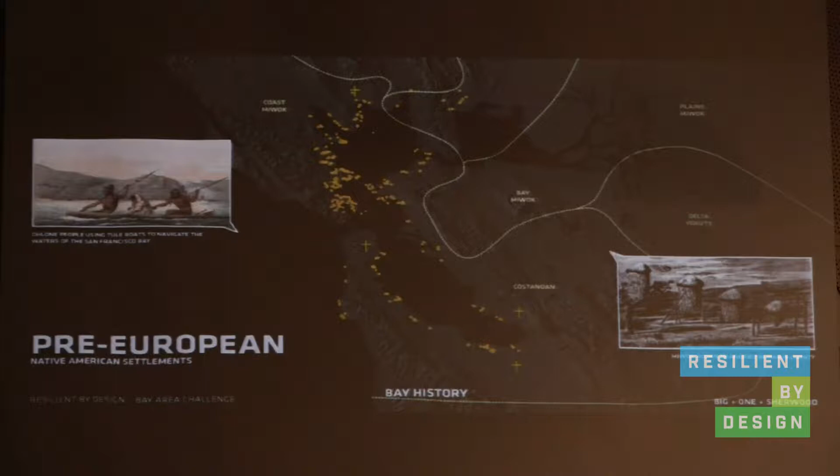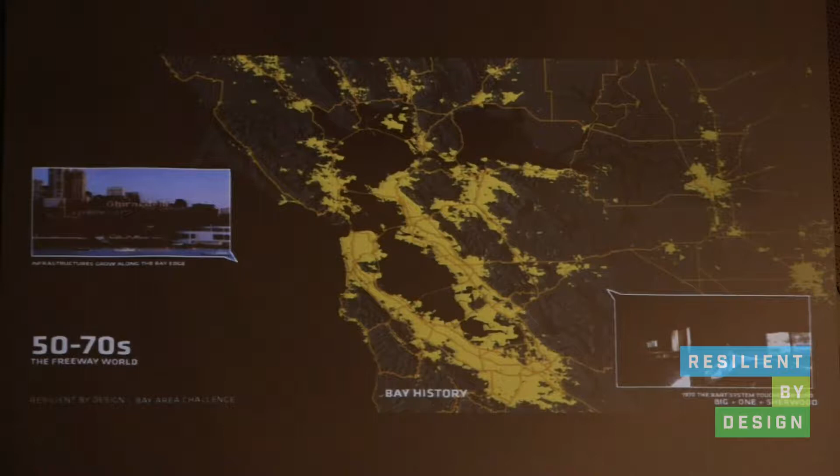If you look from early settlement, Native American, to a series of towns during the gold rush, the Bay has just kind of been expanding sequentially to the point that now it really works as one region, but at a scale that is disproportionate to any means to control it.

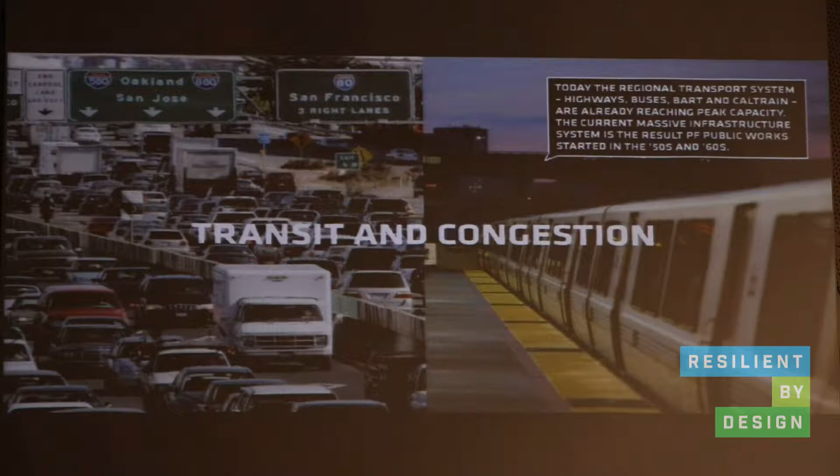And it's that kind of sprawl and development pattern that has led to the urban challenges we know today, from transit and congestion to housing, lack of affordable housing and displacement that results, strained infrastructure bringing flows from far away, ecological decline along the Bay's edge. And those development patterns and the emissions and lifestyle associated with it have also been in part responsible for the climate stresses that the Bay feels today.

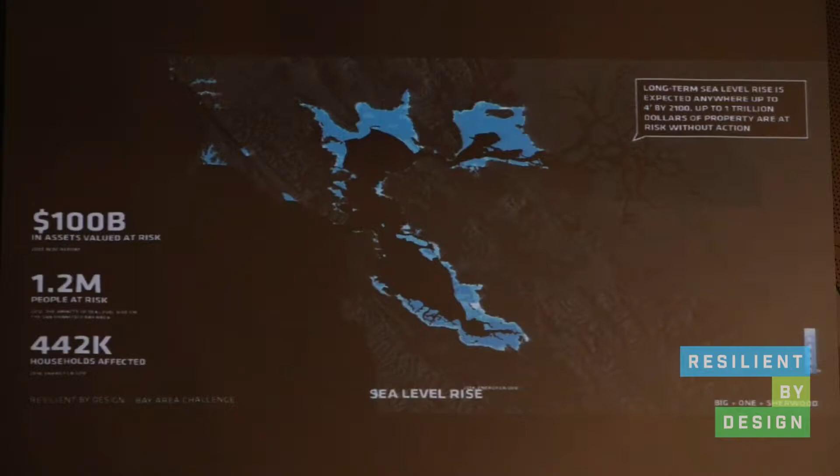From sea level rise and storm flooding, to drought and wildfires, to earthquakes and liquefaction.

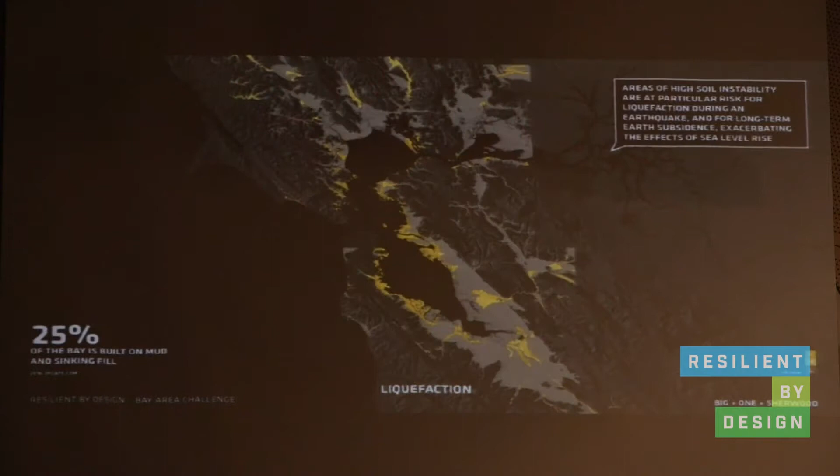And so our approach to the Bay has been that climate stresses and urban stresses are really one. And in order to build a more resilient Bay, we need to work on both equally.

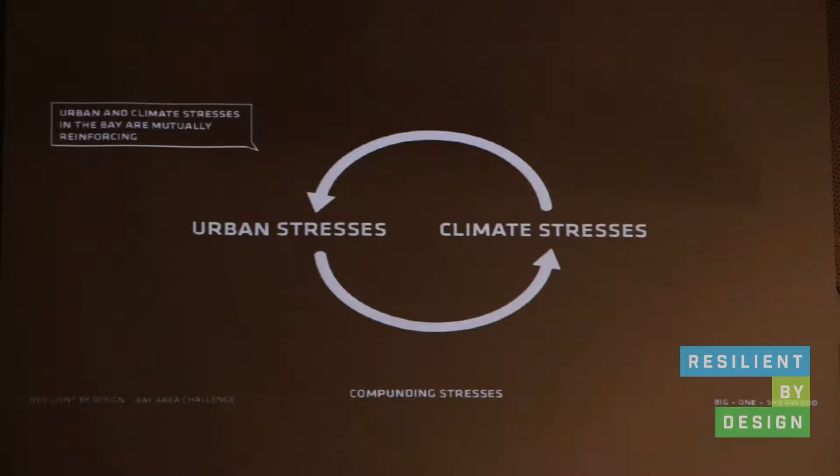Simply put, to become more resilient, sustainable, and equitable, and to deal with some of these challenges, the Bay needs to link its natural systems to its urban systems in a better way. It needs better transit. It needs more housing in the right places. And it needs to modernize and decentralize its infrastructure to build resiliency.

We're also cognizant of the way that things are done in the Bay Area, which is also a symptom of many cities, certainly in this country, that the silos of city making really don't talk to one another. I think in the Bay in particular, you see ecological discussions completely separated from urban discussions. Transit works on its own logic, infrastructure and people all kind of work separately.

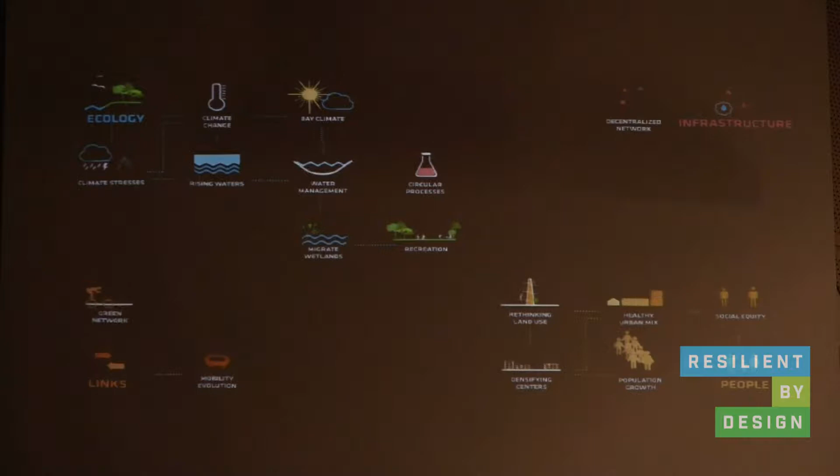So simply put, our proposal is that we need to think of all of these elements together as one, what we call a social ecosystem, where ecological planning provides a framework for growth, where growth responds to transit rather than the other way around, where all the incredible ingenuity and resources of the people of the Bay work to develop these systems, and where infrastructure is decentralized and localized into community.

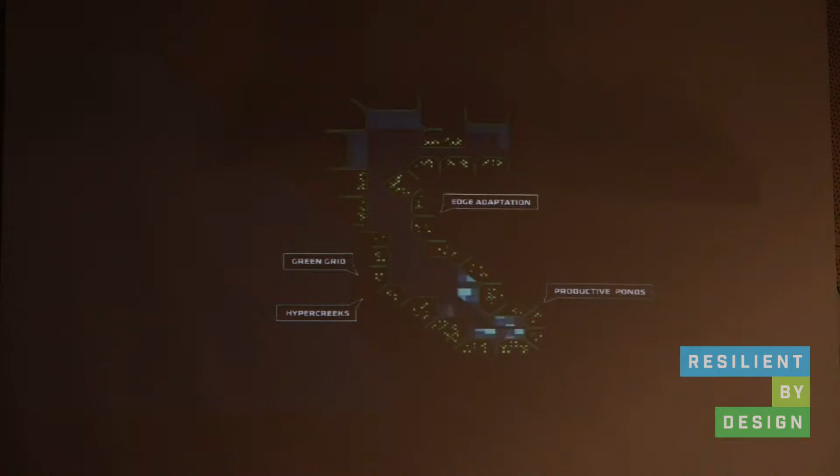Beginning with the creek system that once really defined the Bay, that's been culverted and tunneled over years and sprawled around. Can these creeks become a new kind of framework for the Bay, allowing for an increment for sea level rise adaptation and a new unit of community?

Can we peel back decades of paved over surfaces in the uplands, allowing for better recharge of the groundwater and fighting drought? Can we use the assets that the Bay has to build better transit rather than building new kind of shiny infrastructure? Can we use our roads, use the Bay itself, use our trails, and better connect things in a more flexible way? And can we rediscover the edge of the Bay, both as a place for ecology, but also as a place for people?

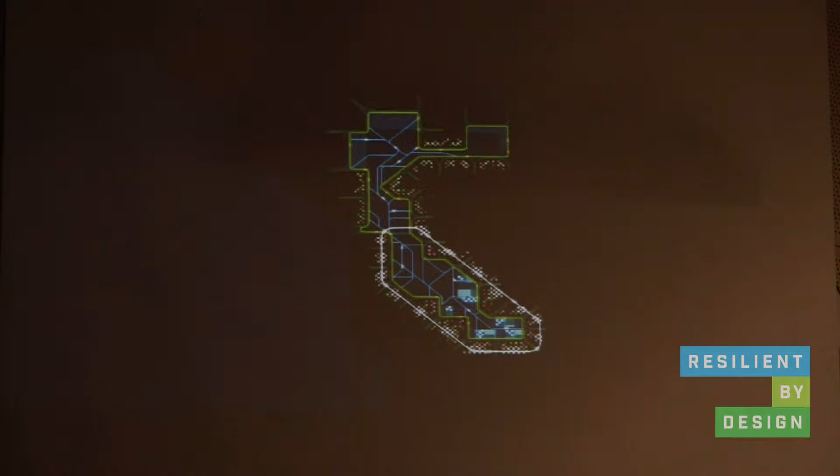So we've looked at 3 design opportunities, and to give you a little bit of a sense of our process, we'll start with the first one up at the Golden Gate.

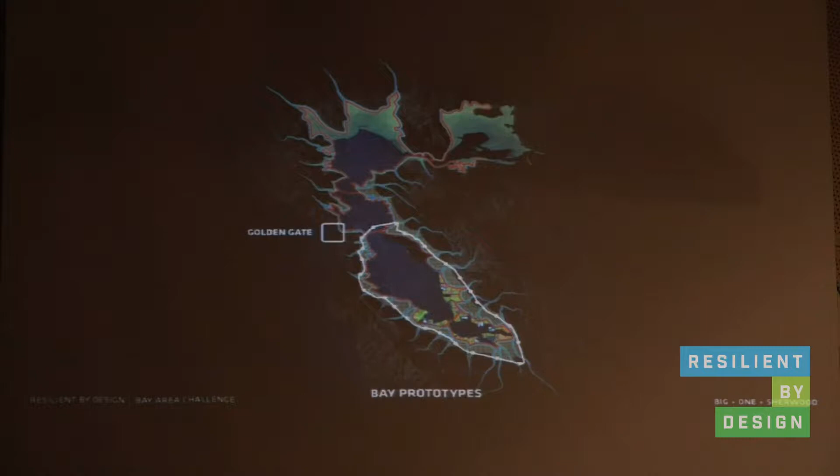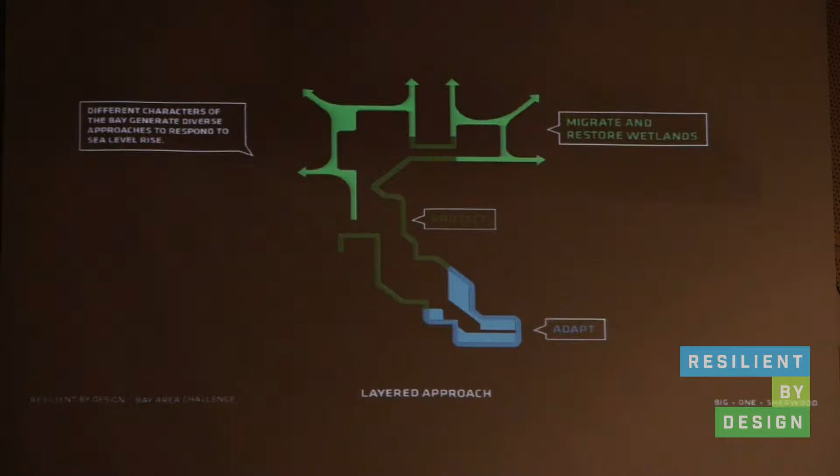Given that the initial frame for this competition was sea level rise, and it is one of the more acute risks in the area, we were curious about the dynamic between local adaptation, which we think can and should take place in order to adapt to sea level rise. It might happen in different ways in different parts of the Bay.

But we also know that there's a lot of uncertainty about the extent of sea level rise and the kind of numbers we're going to be dealing with in the future. So we were interested in looking at a regional strategy that would take a component of this risk, tidal, kind of annual king tides and storm surge, and deal with it on a regional level.

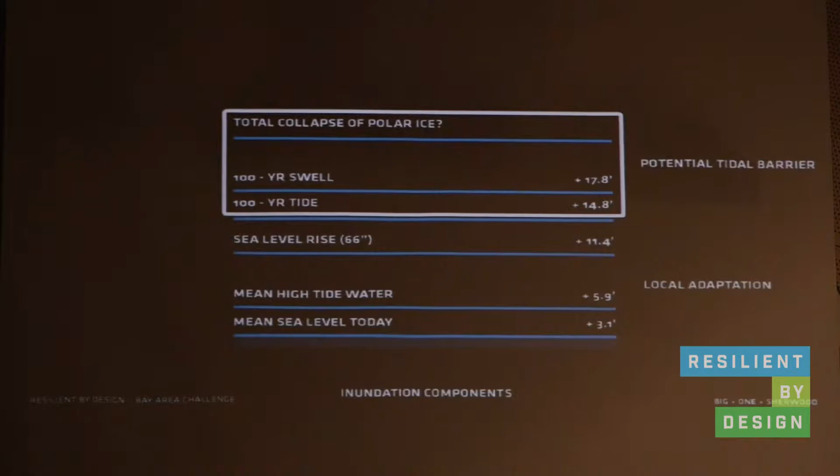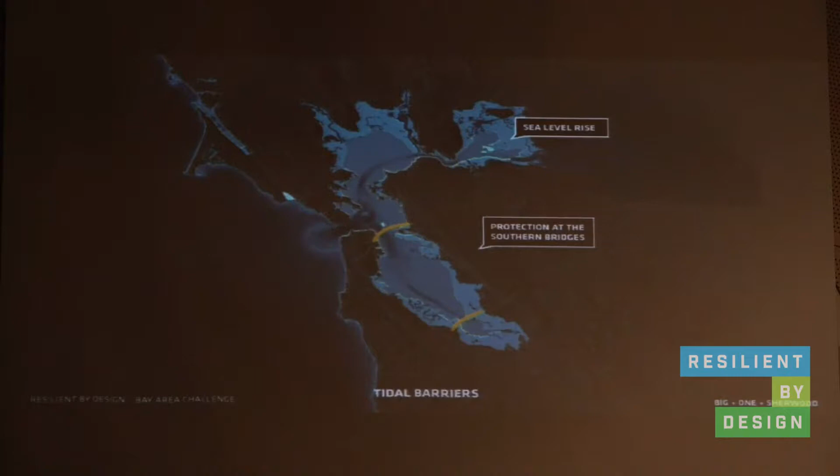We looked at the difference between 500 miles of investment in levees to keep up with potentially extreme height, and also a series of locations for tidal barriers, including the Dumbarton Bridge and the Bay Bridge. Then we looked at the Golden Gate Strait itself, the location of the BCDC competition several years back.

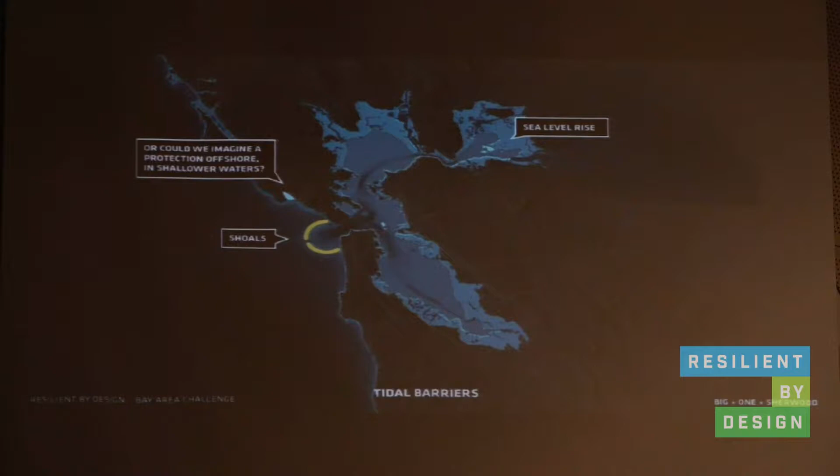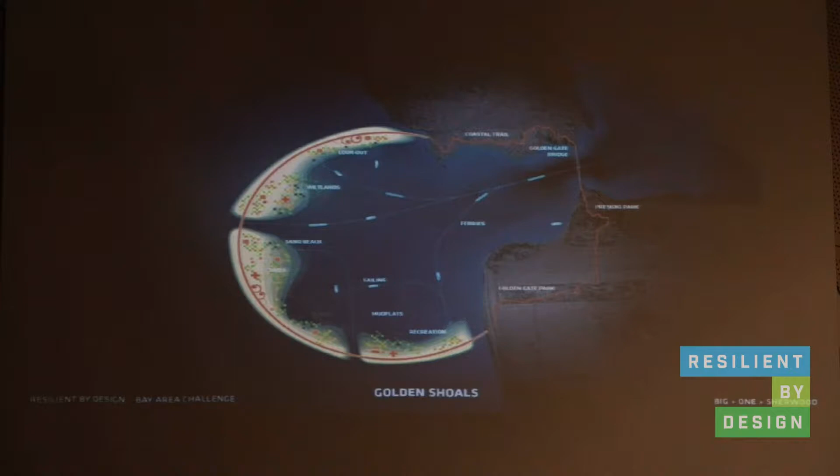We developed an alternative proposal for this area, building on the 7-mile crescent of shoals left by sediment deposits coming out of the bay. Using about 30% of the material it would take to build a barrier in the deep prism there, about 7 million cubic yards of fill, you could create a barrier that would handle more extreme levels of sea rise and tidal inundation, while allowing for maritime traffic. We think this is interesting and worth looking at.

But we also focused our attention on a series of other sites at a more local scale, starting with Islais Creek.

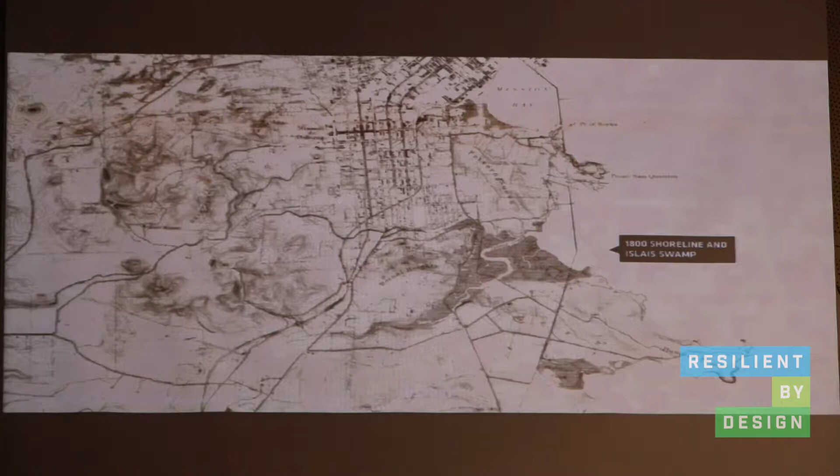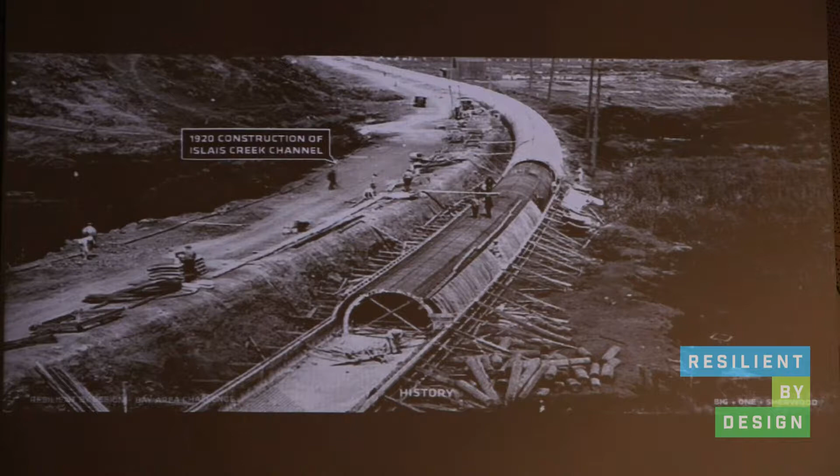Islais Creek is, I think, a really important site that's been at the center of a lot of industrial activity in San Francisco, and is also the site of one of the original ecological and wetland systems that no longer exist at any serious scale in San Francisco. This part of the city was culverted and put into creeks at the formation of the city and the development of the southeast part of San Francisco.

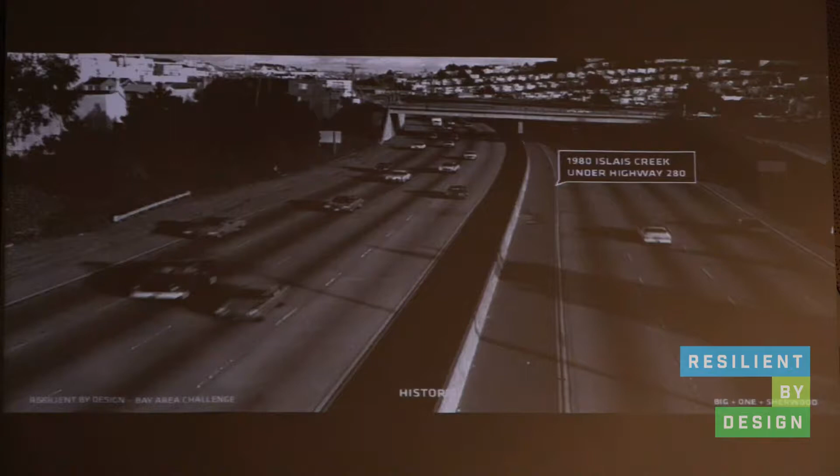The need for the expansion of freeways and circulation infrastructure has added additional layers on top of Islais Creek for circulation and transportation.

Beyond that, this has become a hub for a lot of the maritime activity and port activity on the waterfront, which has changed in nature and scale over time, but still has a deep water harbor and significant productive use, including providing a number of jobs, which we've heard from people living in the neighborhood are extremely important to preserve in that location.

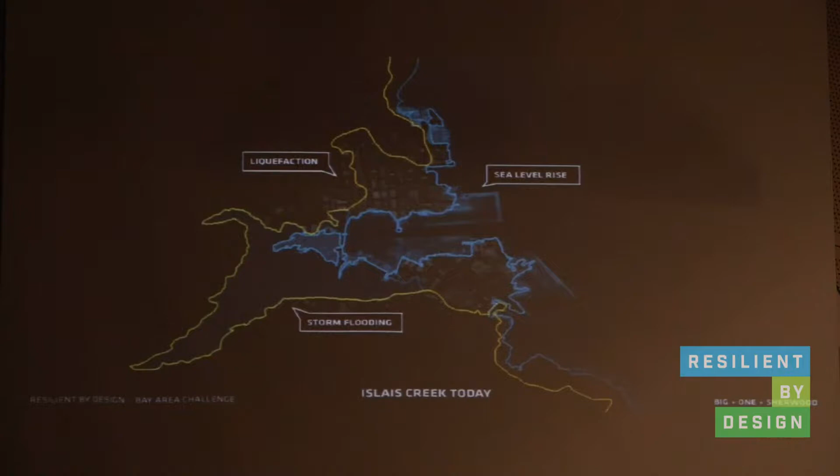It's a very challenged part of the city from a sea level rise and flooding perspective, not just at the waterfront, but all the way up to the top of the ridge near Twin Peaks, where in this watershed basin there is flooding very often that creates a combined sewer flood condition in a number of parts of the neighborhood. Our proposal would start to address that, and much of the industrial land shown in purple on this slide is positioned in what was historically marshland in this part of San Francisco.

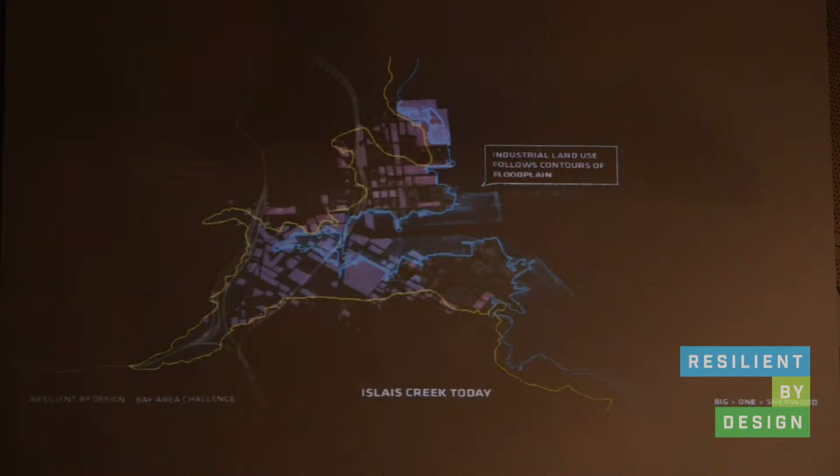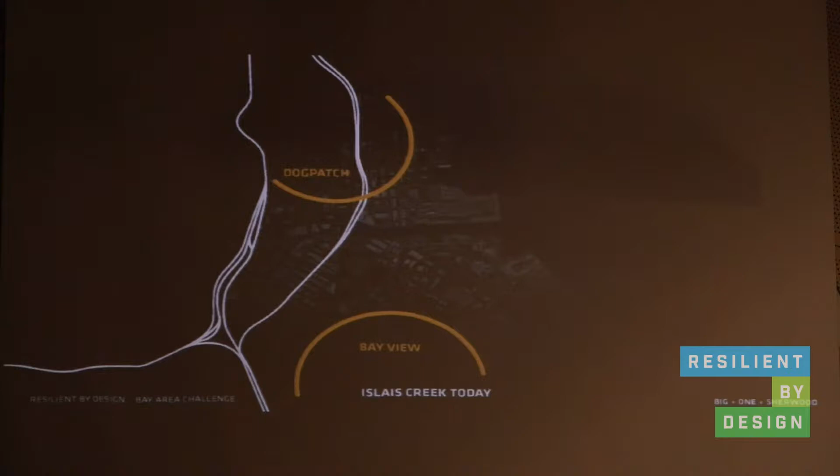Here we've overlaid the two major freeways that run through this neighborhood, effectively connecting or passing over the two residential communities of Dogpatch and Bayview, Dogpatch to the north and Bayview to the south. We see this part of the city as an incredible opportunity, one that the city has put forward as a design opportunity for us to consider, and so we've taken a really bold approach to say what could be possible here.

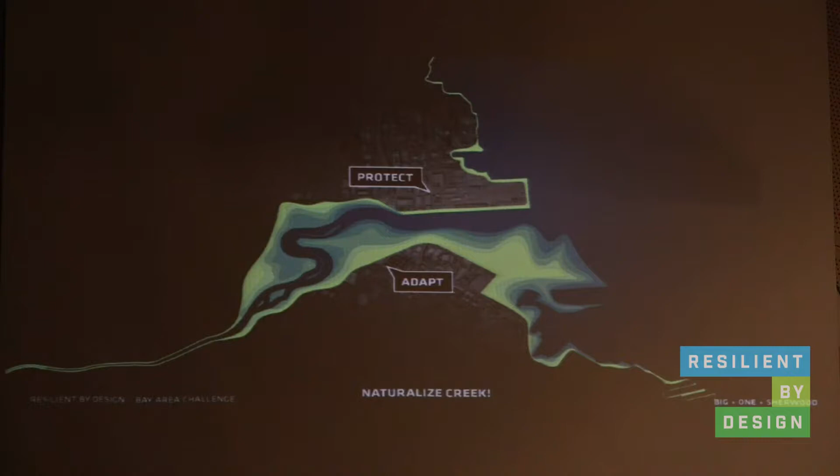It started with listening to people in the neighborhood, touring all the different sites with many of you. Our proposal starts with an idea that asks: could this be a place where San Francisco creates a 300-acre restored wetland and riparian system as part of a restored marsh? Could we take what is now a small inlet that once was one of our most important creekways, and really restore it substantially to the south and to the west?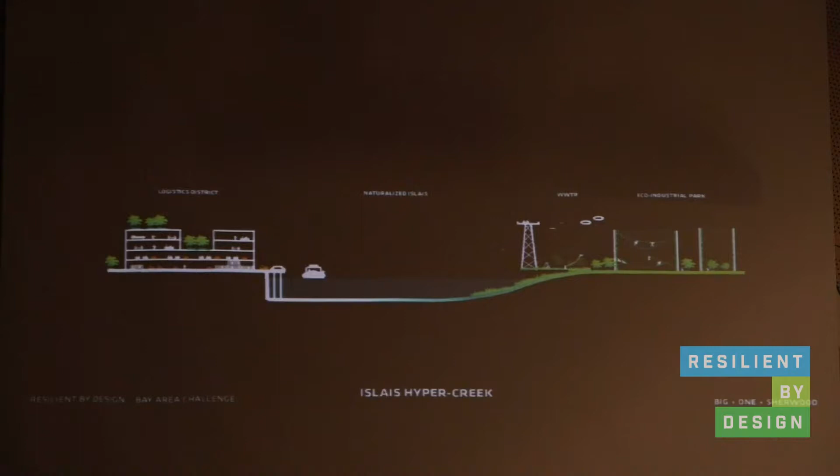And to take the existing channel and transform the southern side, to take some of that 300 acres of industrial land to create vertical industrial development opportunities for a net positive increase in the density and development of this neighborhood, to provide more jobs than there are today, but in a more compact location that allows for the ecology of this to come closer to its original form.

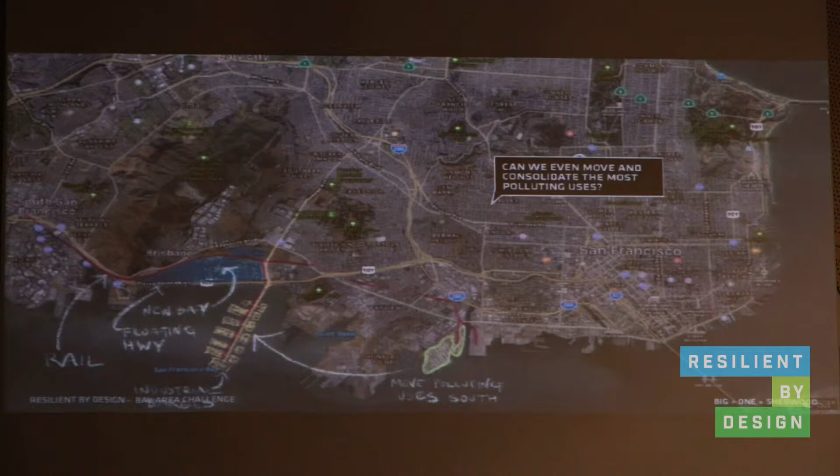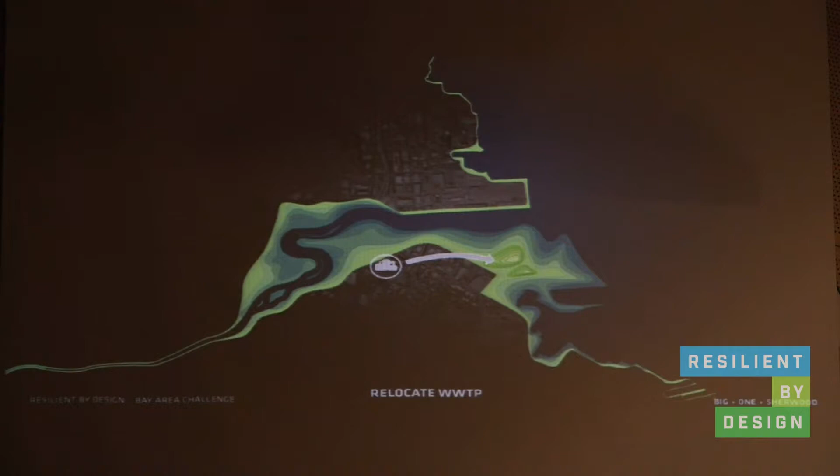So you can start to see this evolution that might be facilitated by moving some of the heavy industrial uses potentially to a new series of barges or a reconfiguration of Brisbane Bay to the south, and potentially even relocating parts, if not the entirety, of the wastewater treatment plant currently adjacent to the Bayview neighborhood. We don't have all the answers in the sequencing, but we have a good idea of the process today and the potential evolution to more ecologically integrated means of managing and processing wastewater at this massive facility that today takes 80% of the city's wastewater.

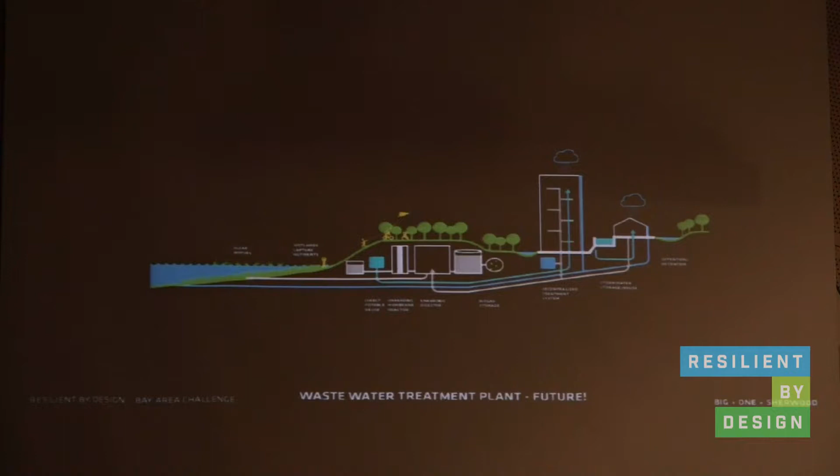Could that start to be thought about differently? We think so as part of our proposal. And I think Jeremy is going to continue with a couple more ideas. Sure, so this gives you a sense of the resource recovery park and plant on the edge that Bree just talked about.

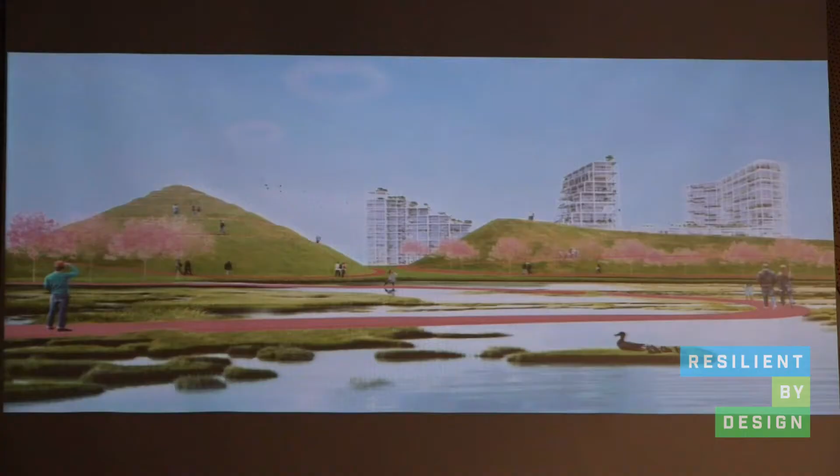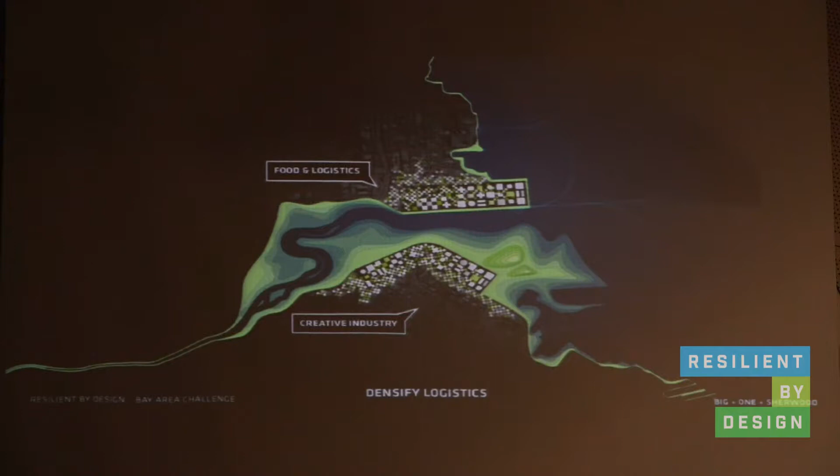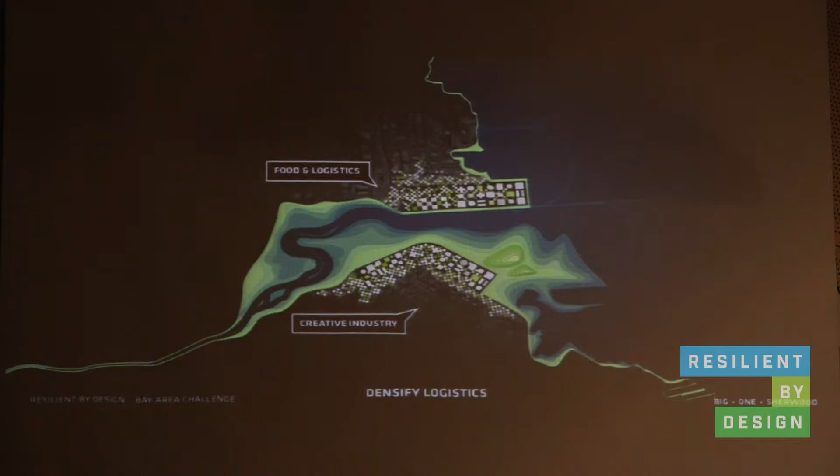So what all of these infrastructural improvements do is provide a frame for resilient growth. And as Bree said, what we heard loud and clear from the community when we visited was that the kind of industrial jobs in the neighborhood should not just be protected, but increased. So what we propose is a densification of industry, logistics connected to the Deepwater Port, maintaining this area as a critical node for San Francisco to its south, and taking this low-rise industrial area that sits in the floodplain and really densifying it.

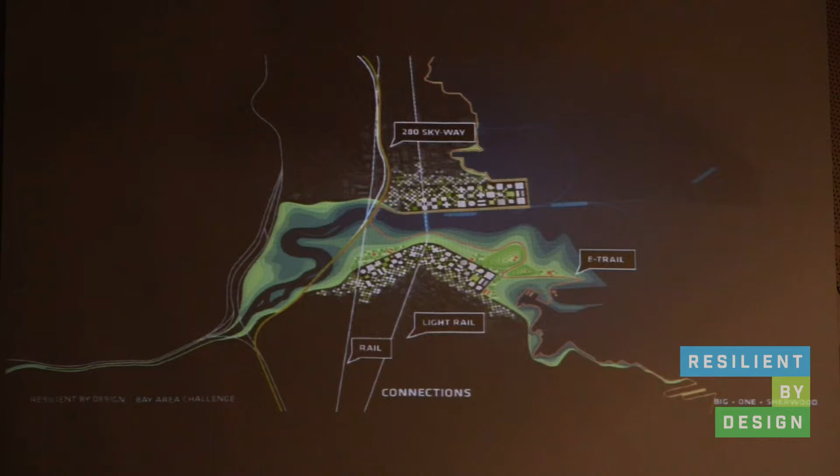We also see opportunities to connect. I-280 has been contemplated for a long time, this spur that juts off of the 101 and runs north, for a decommission and potential demolition. For us, the cost of demolishing it might actually be better spent to enhance it, not as a machine for cars, but rather as a machine for light mobility, for pedestrian connectivity, with spurs reaching into the neighborhood.

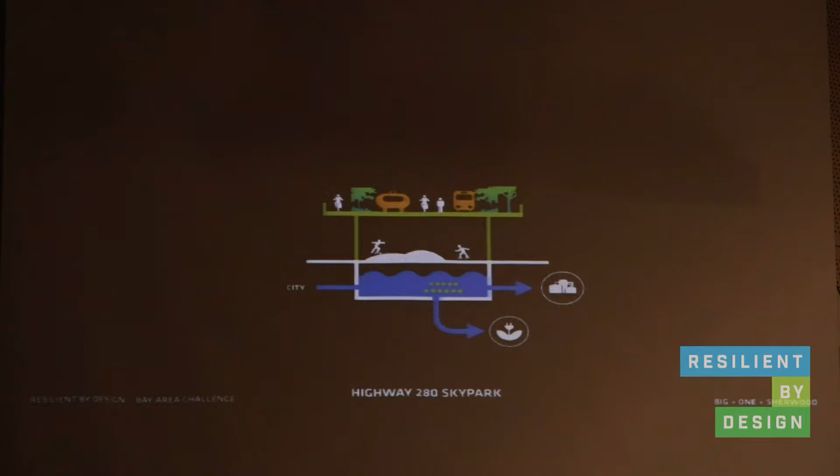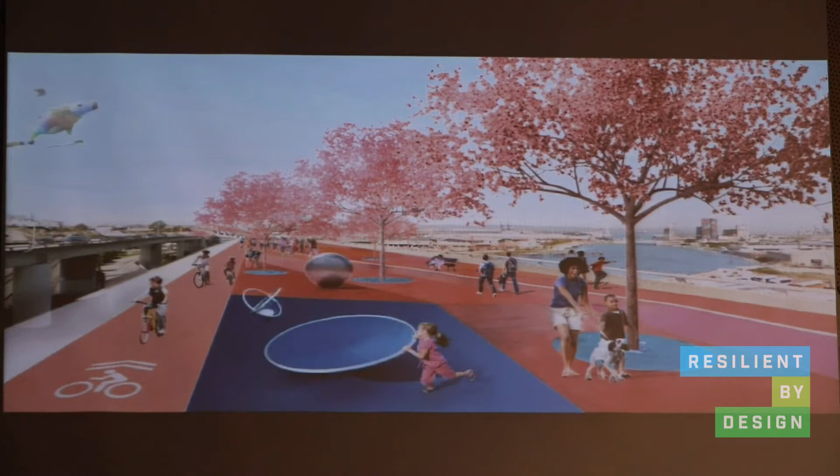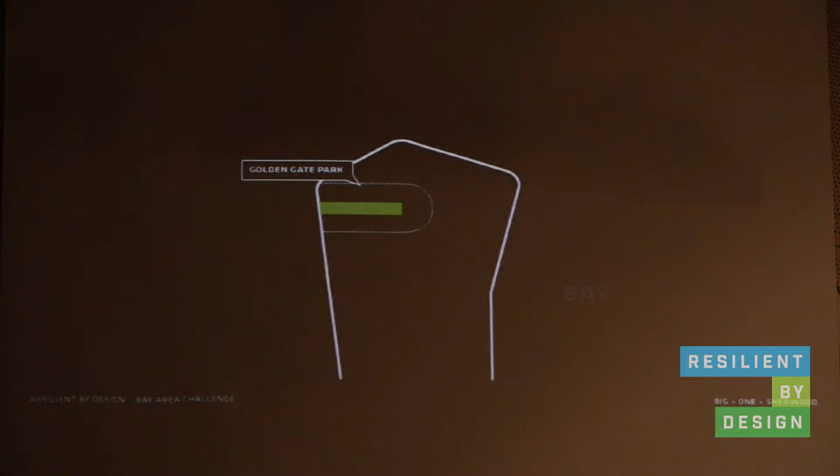This is Islais Creek in the background. So from a gray, kind of tunnelized, culverted creek, disconnected along the transect, to an activated, natural, and also industrial heart for Bayview. We also see this really as no small plan. If San Francisco itself has Golden Gate Park, which serves a huge area around it, there's really a lack of this kind of open space in this part of the city. So we really see Islais Creek Park as the green, resilient, and industrial heart for this part of the city.

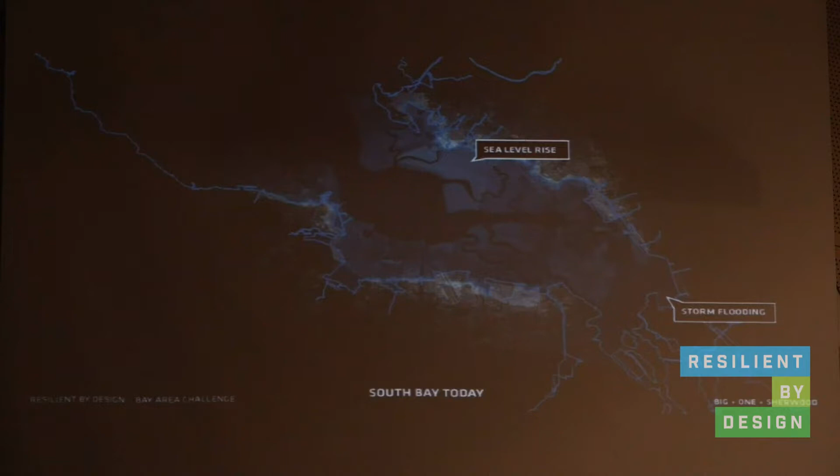So I'll talk a bit about the South Bay design opportunity that we have. And of course we call it South Bay Living because we think South Bay is known for many things, but not really for living. If you can even afford it, it's not good for living. It's for traffic jams, it's for Silicon Valley, it's for inequity and all these things.

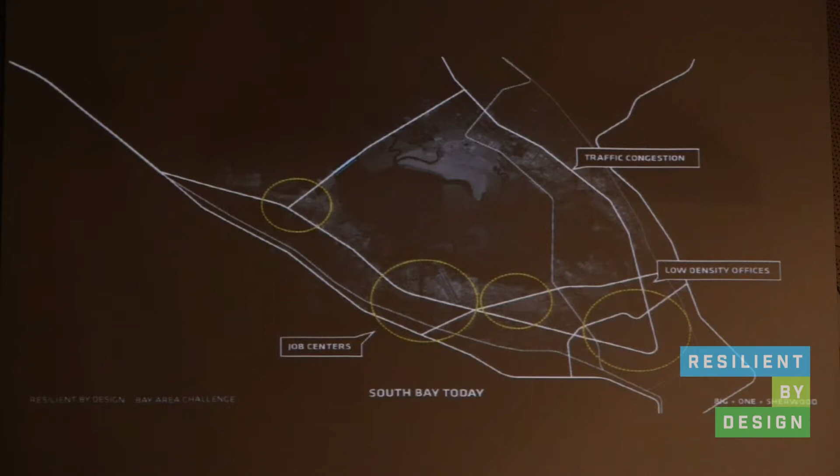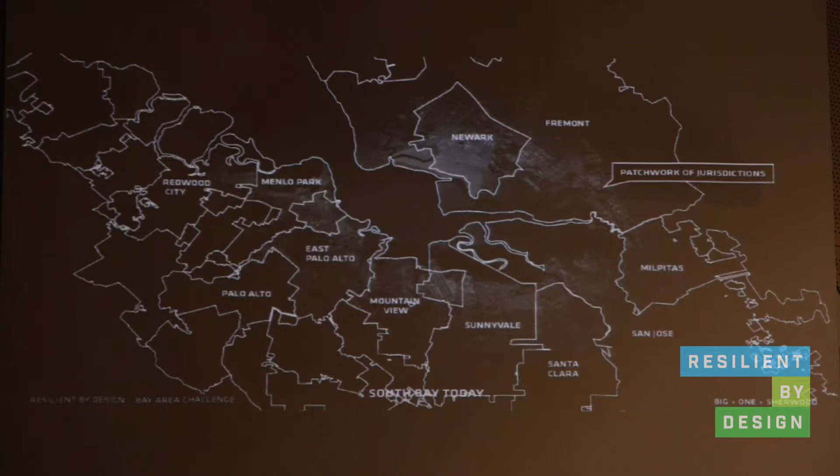One of the things about the South Bay is that you see many urban stresses coming together there, and those will be compounded by climate-related stresses from sea level rise. We feel it's very difficult to address these stresses so far, in part because of the atomized way in which the bay has organized itself. So what we propose is a systems perspective on the South Bay.

Which maybe starts with thinking about mobility and transit, where you see that it's really car-oriented. Caltrain comes there, but hardly anyone ever uses it, which is logical because there's no way to get from the stations to the different workplaces that are there. And that's why even big ideas, which we all enthusiastically work on, specifically Bjarke and his firm, like the Hyperloop, are things we don't think are opportune here.

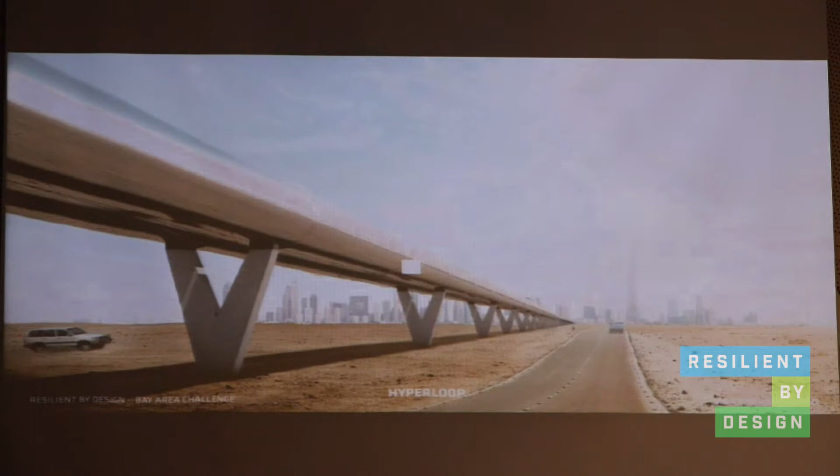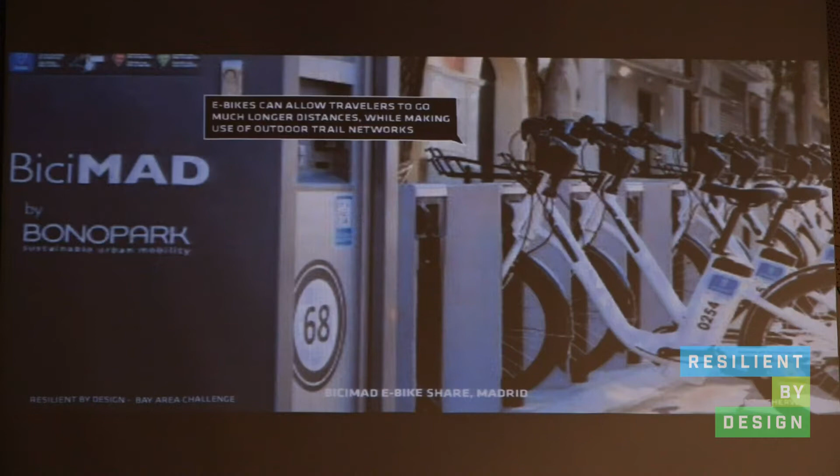We think that, especially given the innovative culture that is there, you might look at developments in mobility technology, and you might want to look at the existing assets that are there: the trails, the highways, maybe even the ferries. So we think that if you want to approach mobility, you might start thinking: can we activate these trails for e-bike mobility? Can we start to think how these e-bikes could connect both to the uplands, to the different workplaces, but also maybe to a ferry-related system.

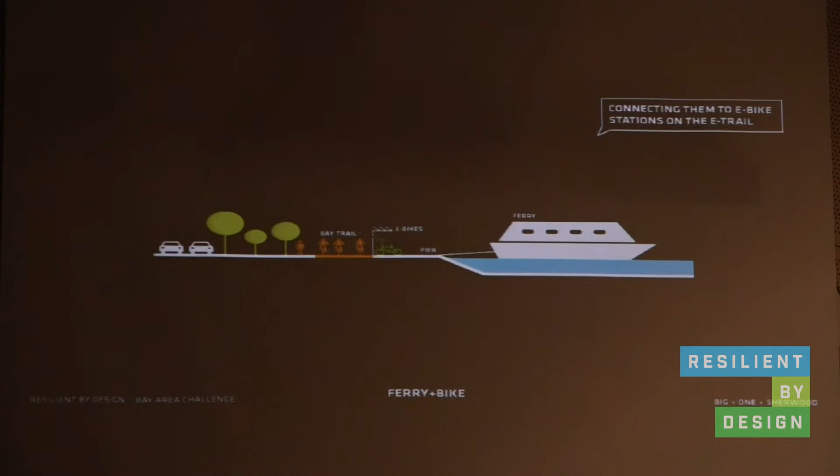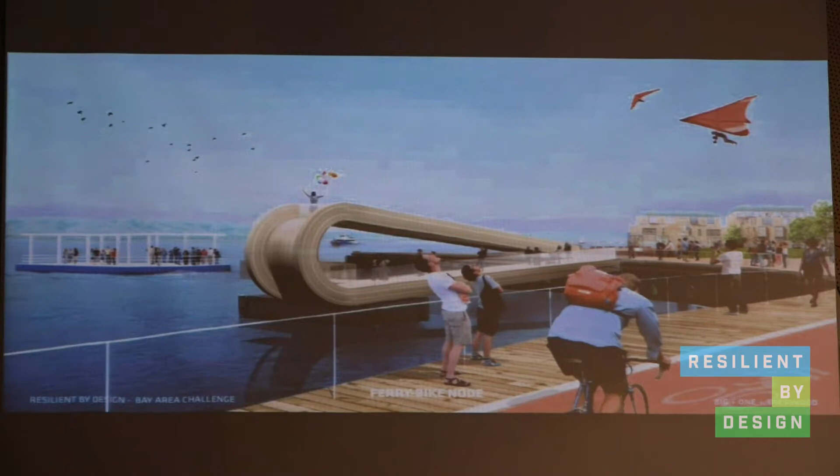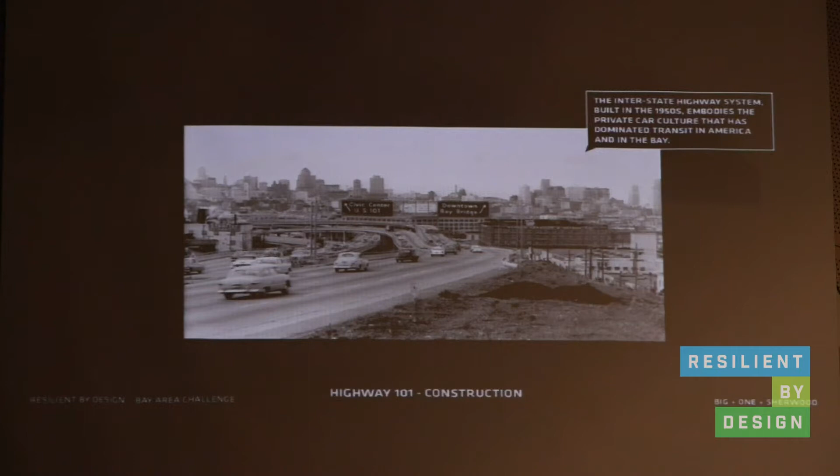This ferry boat, of course, is too big and will have difficulty getting into the South Bay, but you can imagine that in the future, especially with sea level rise, there's a whole new set of ferry technologies that can work very well there. A second component of that mobility strategy would be to rethink the highways, which are now big, clogged arteries through the South Bay.

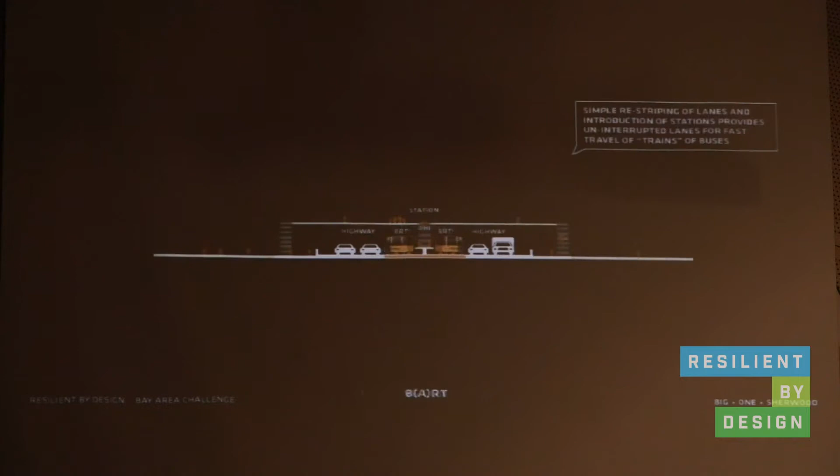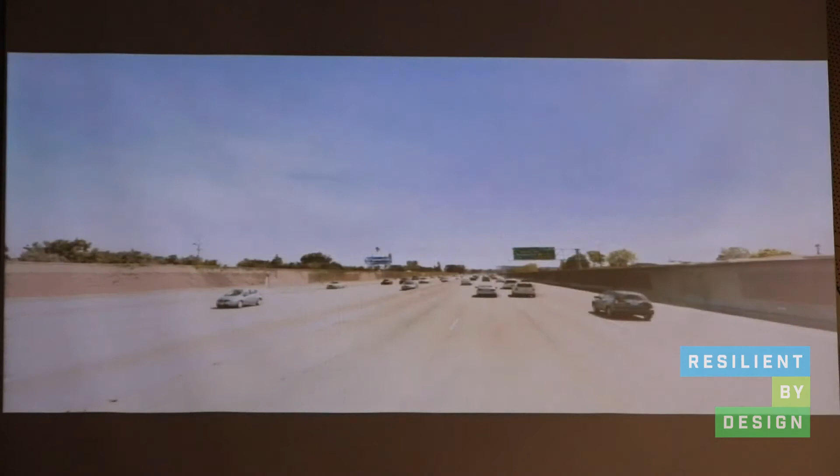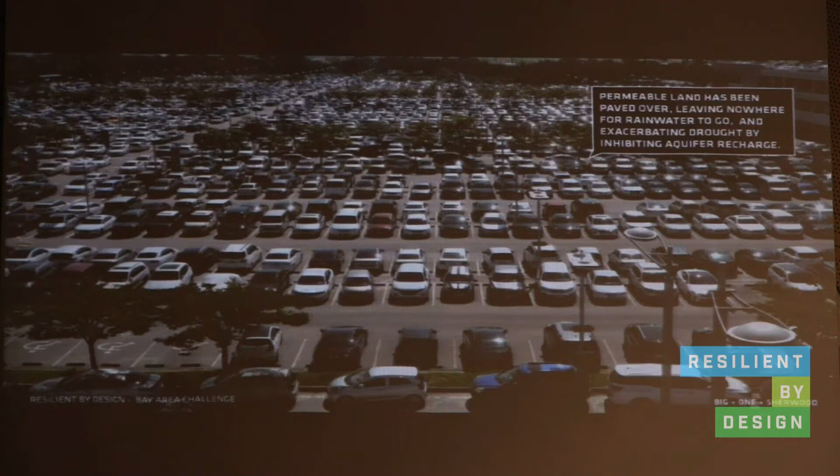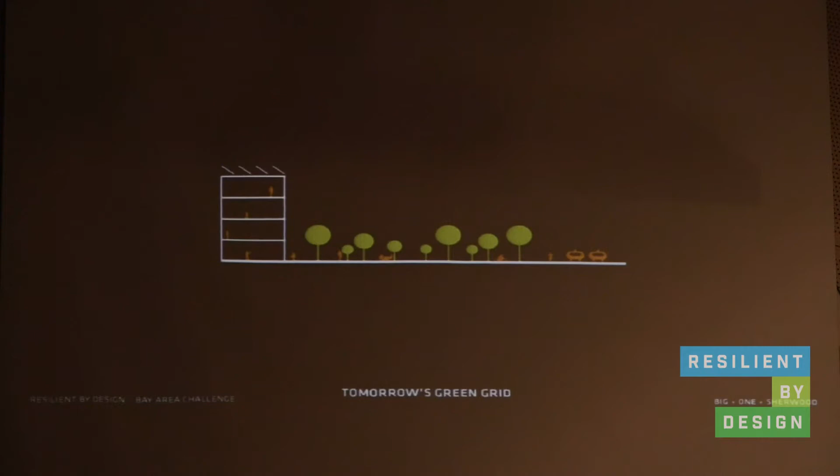A second component of that thinking is once you start to think about how we can use these developments in vehicle technology, you start to look differently at these parking places that are now large swaths of impervious surfaces that might not be needed in the future because of mobility changes. So we can densify them in parts, build other programs there, and at the same time green them and create spaces for water, so that we really make the gray grid into what you could call a green grid.

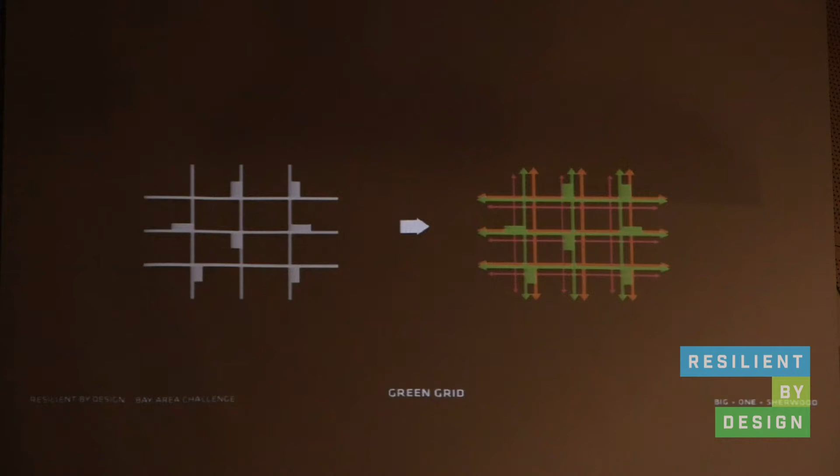We made the calculations and figured out that more than 500,000 dwellings plus a lot of jobs could be done at a relatively modest height. And that brings, if you link those two systems together, you can really start to think about a densification strategy in the South Bay.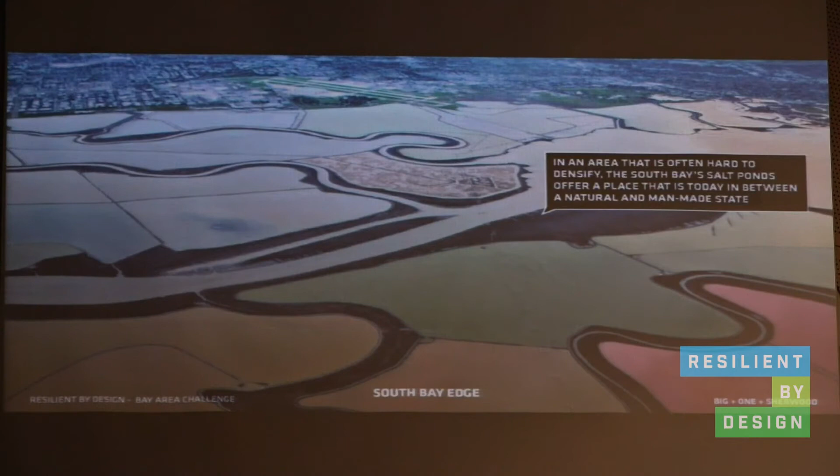To which a third element, the ponds, could be fantastic assets. These ponds, and people have talked about it, we think will not function in the long term as a nature system, as a natural system. They've never really been that, so we think they should really be explored as a constructed environment with a lot of different functions that they could have.

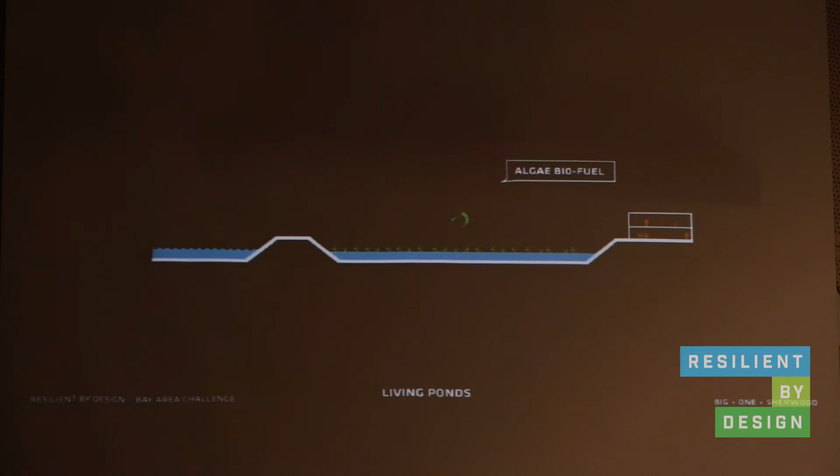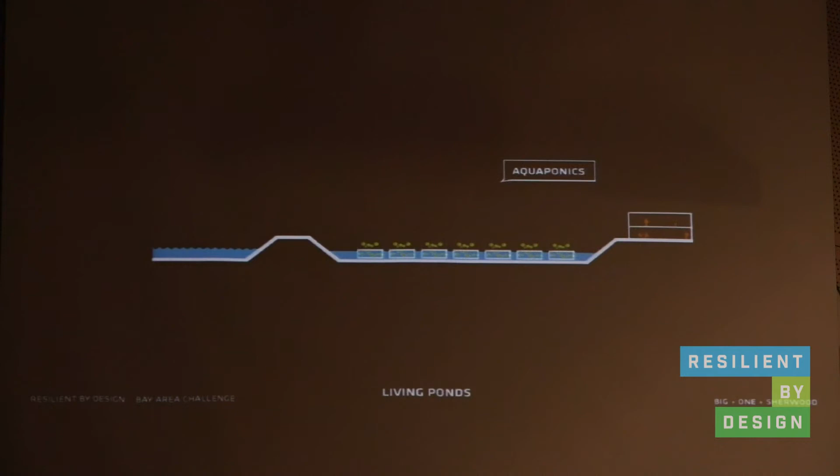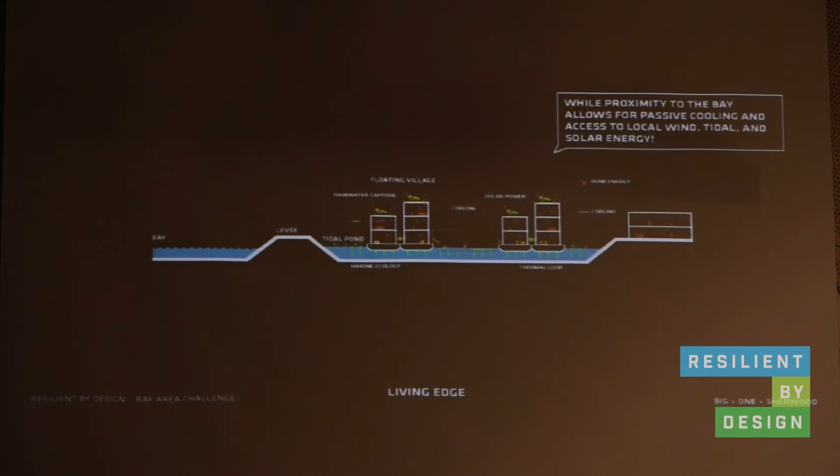Ponds could be there for algae production. They could be used as batteries. They can be used to retain stormwater. They can do solar. And in the end, once you start thinking about that, you can start thinking about floating villages there that in themselves can also become interesting elements for innovation, where you link these systems together on a smaller scale.

We feel that as we talk to the people in those areas and understand their stresses, but also understand their forward trajectories, that there's really a project there—a project that not only works to create a lot of housing, a different view on mobility, but which can also give a different sort of signature on the bay.

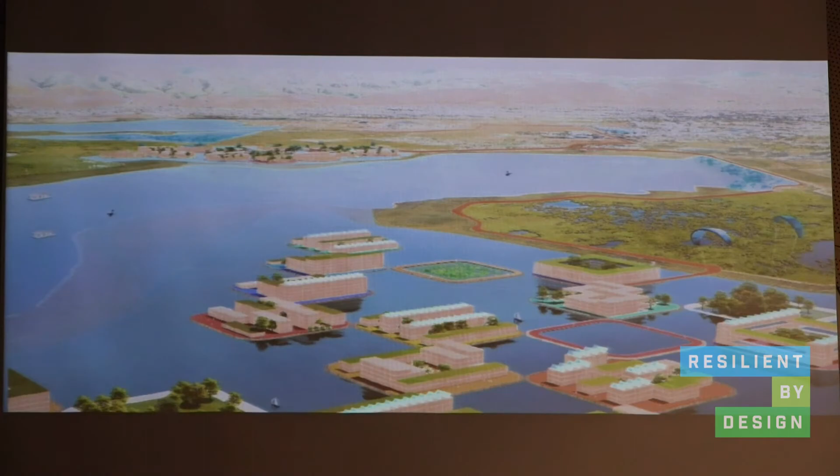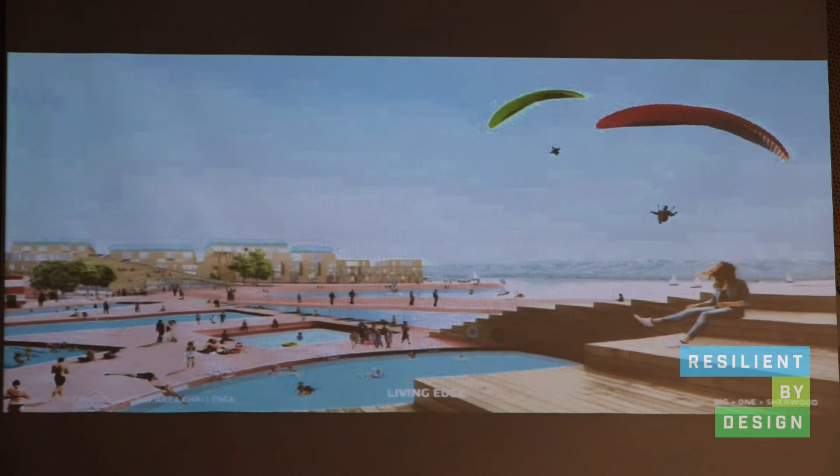So imagining, as Matthijs said, not only infrastructural functions, but also living at the edge.

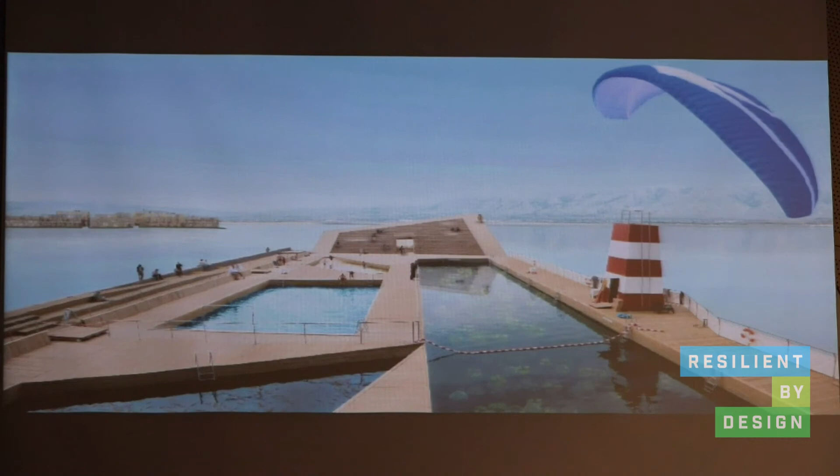So I'll just close by saying that for us, climate change adaptation is about solving problems, but in the end, it's also an incredible opportunity to make places better. So whether it's South Bay having a new kind of appeal on par with South Florida, or a new green, resilient heart for Islais Creek, we really see opportunities in the Bay to rediscover nature, to rediscover all of the systems that have been disconnected from one another, and create a better place to live. Thank you.